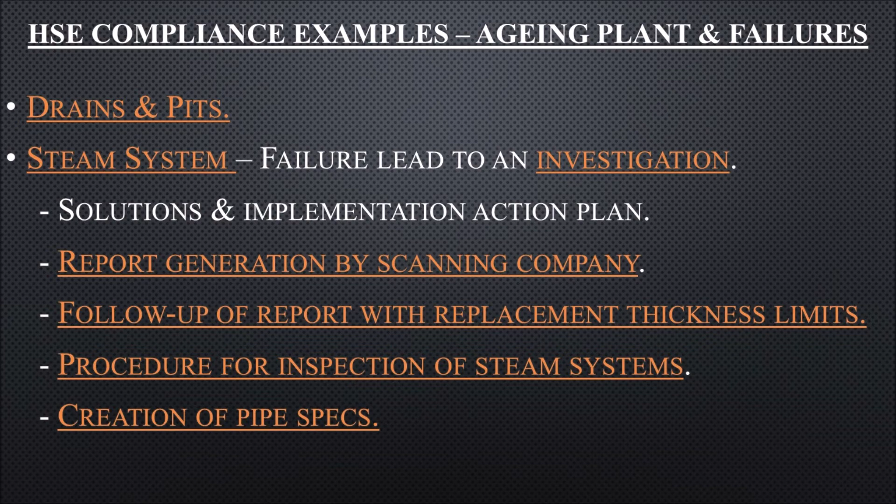This presentation gives examples of projects worked on which were required as part of health, safety and environmental issues.

Chemical pits and drainage systems. Rainwater, sewage and chemical drainage containment systems all had issues and required a full survey to diagnose the scope of works required. A specialist drainage CCTV company was contracted to carry out surveys, locate problem areas and advise on repairs. This data was used to update the client's GAs and document repairs required, with time and cost schedules to coordinate workarounds during repairs and permitting.

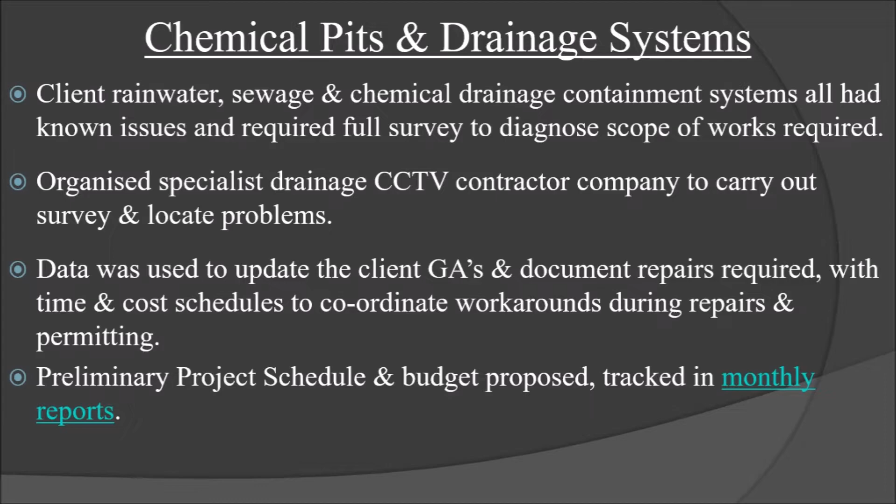Preliminary project schedule and budgets were proposed. Once approved, these were reported on monthly. Survey phase: the existing GA was given to the contractor to assist surveys.

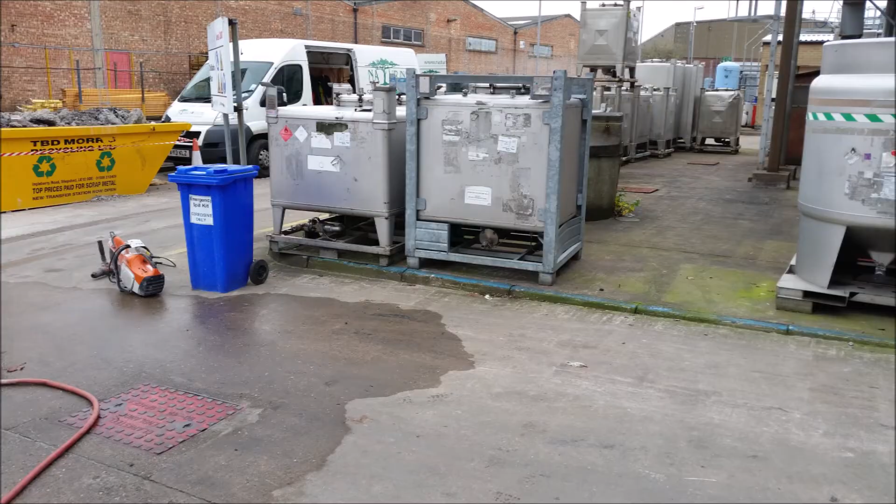There was a setback as a number of manways were sealed shut, requiring breakout and replacement. Once manways were replaced, surveys were completed and numerous issues were identified, including GA errors, holes to ground, man-made and natural penetrations, joint misalignment and cracks.

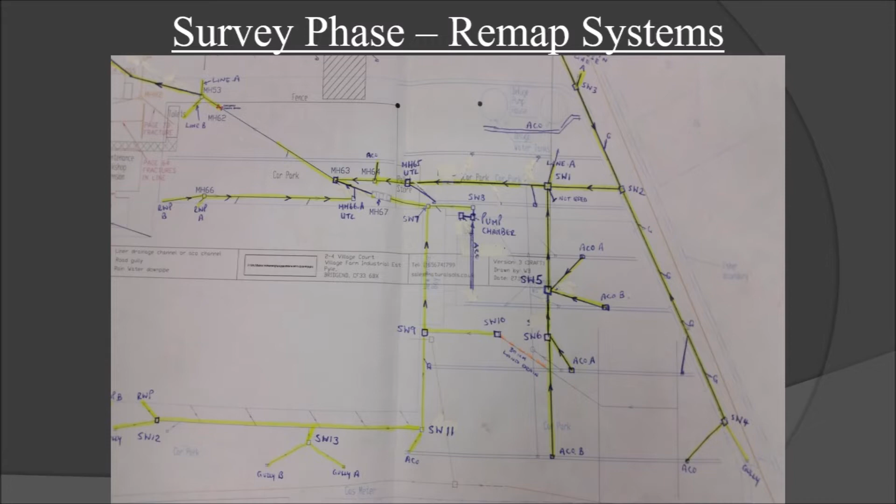The sewage system was outdated, with pitch fibre pipe found to be blistered and crushed, and surface water issues. There was not enough rainwater drains for the surface area.

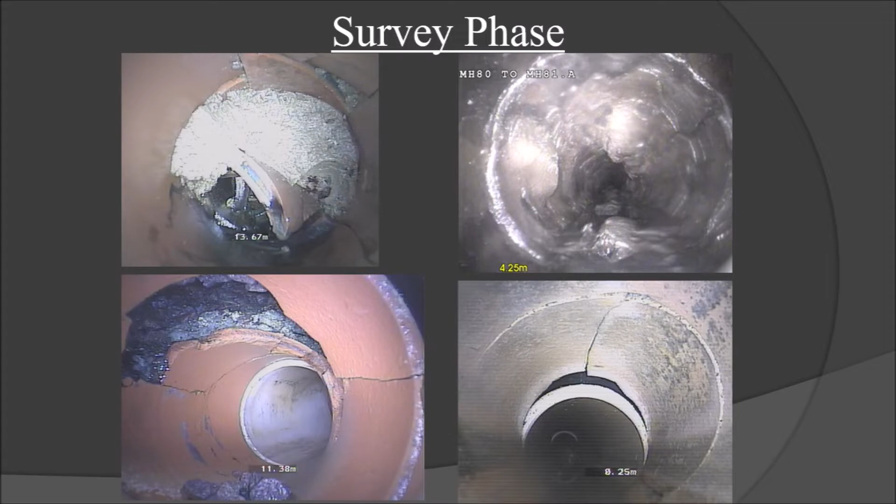Analysis of redrawn systems via HAZOP showed that in some areas chemical separation was required to prevent incompatible materials mixing in the event of containment failure.

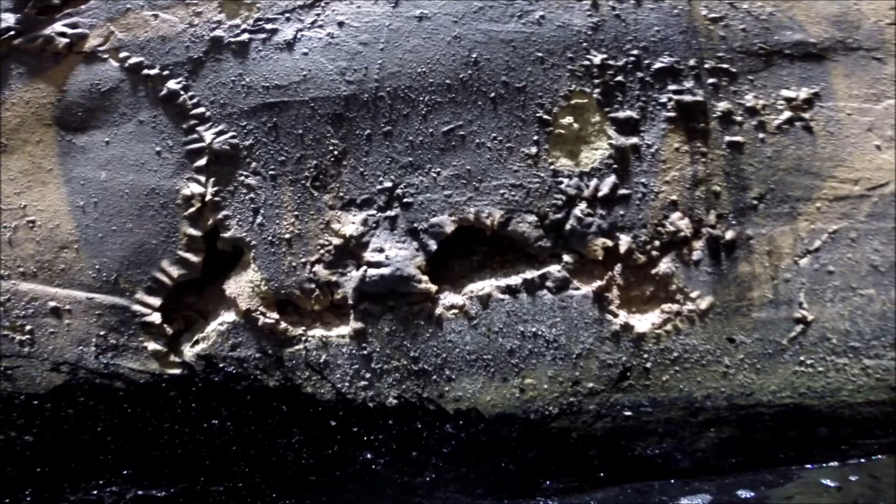Proposals for separation and rerouting of existing systems were presented and agreed upon in a series of meetings. Underground pits were badly corroded, and due to the difficult nature of maintaining these, each system was redesigned to isolate the pits and replace with local sumps and above-ground pumping with auto-start sensors and gas detection systems.

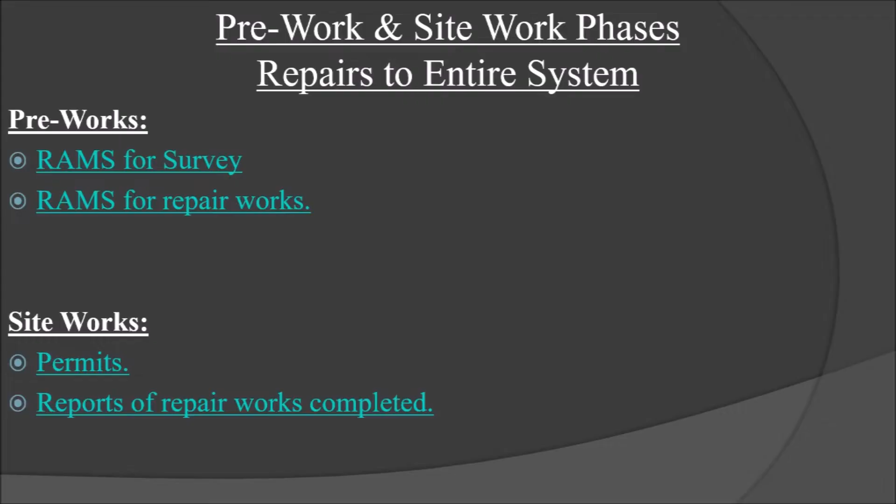Repairs to systems were examined in pre-works meetings. Examples show RAMS for surveys and repairs once these were agreed upon. Permits were issued, and once work was complete, reports were provided.

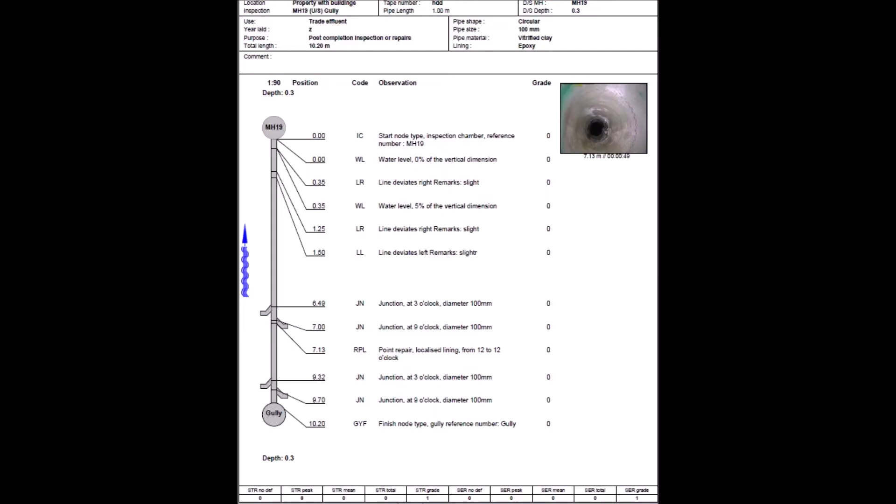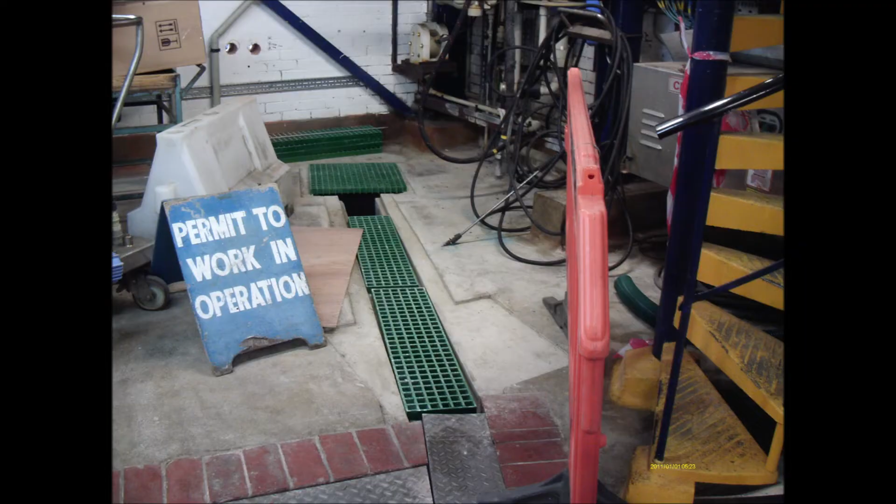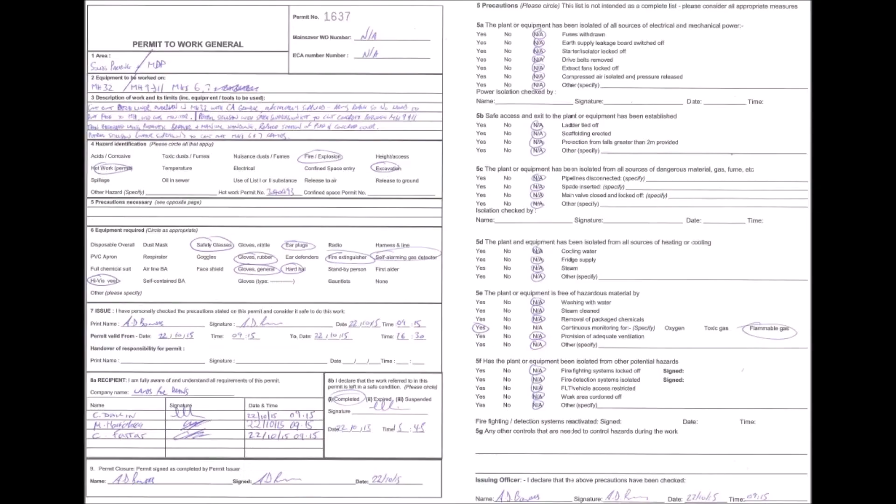While repairs were being carried out, design of improved systems was undertaken. This example shows the use of temporary pumping to IBC to maintain operations and keep the gully dry, enabling works of extending the floor gully and installing a sump for the long-term solution of pump and piping system with integrated vapour detection. Site works for these required permits before commissioning and handover of the installed system.

During these works, it was noted that the existing brick gully was failing with many loose bricks, resulting in chemicals getting past this gully and damaging the floor. A general arrangement was created of the existing gully system for the client to obtain a quote for recommended future work: replacement of bricks with chemical-resistant coated concrete.

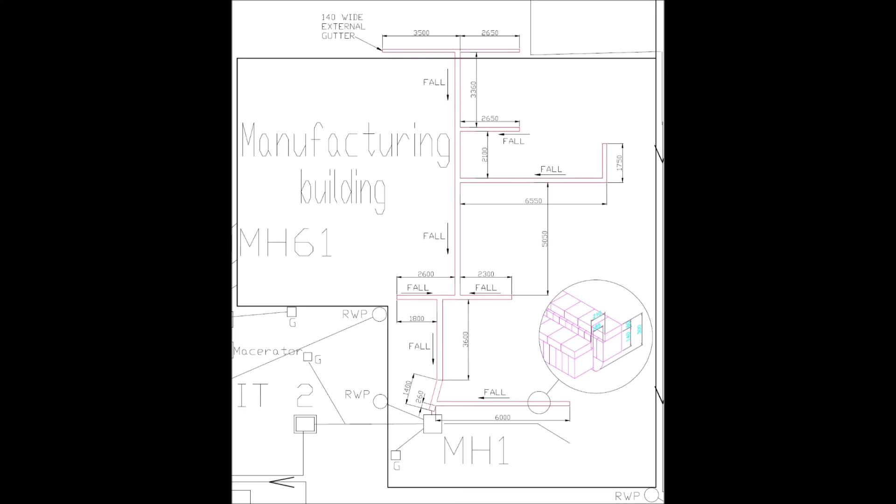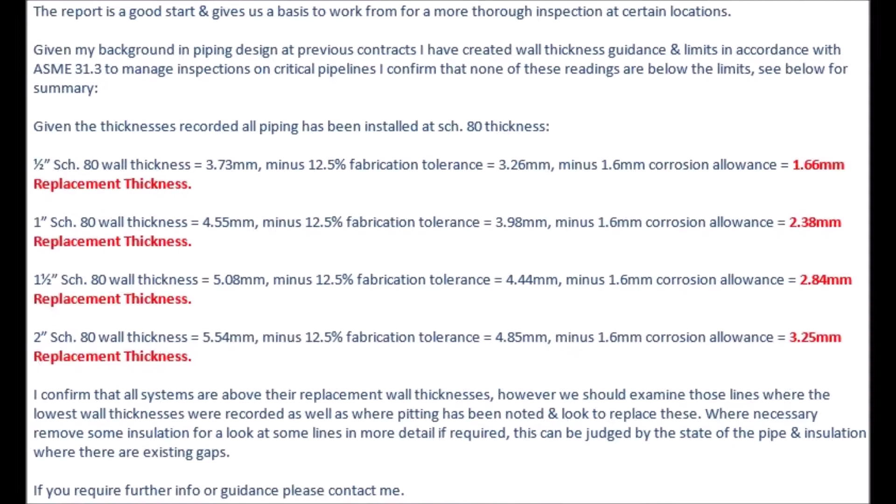Failure of a steam system led to an investigation. A solutions and implementation action plan was created, requiring a report by a scanning company, which was followed up by replacement thickness limits defined from ASME code, and the creation of a procedure for inspection of steam systems, along with pipe specs to prevent the use of threaded pipe on steam systems again.

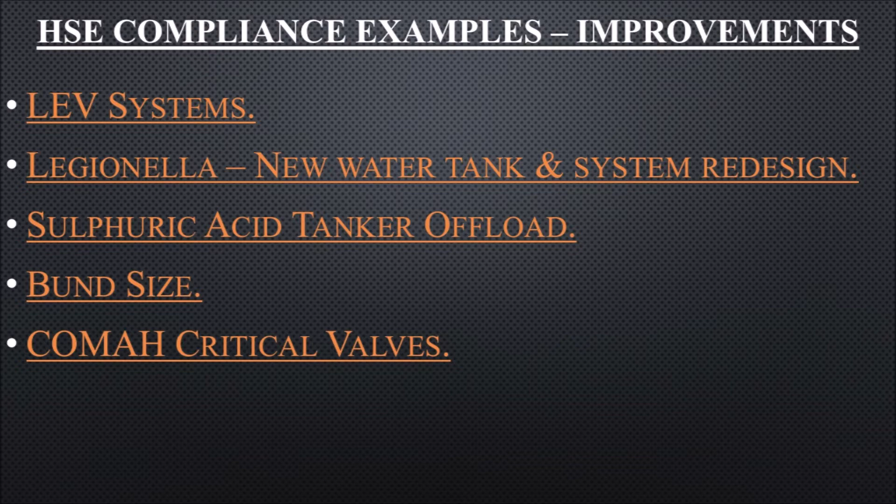HSE compliance examples: LEV systems. A report from a specialist highlighted non-compliant LEVs and actions required due to poor design and damaged equipment.

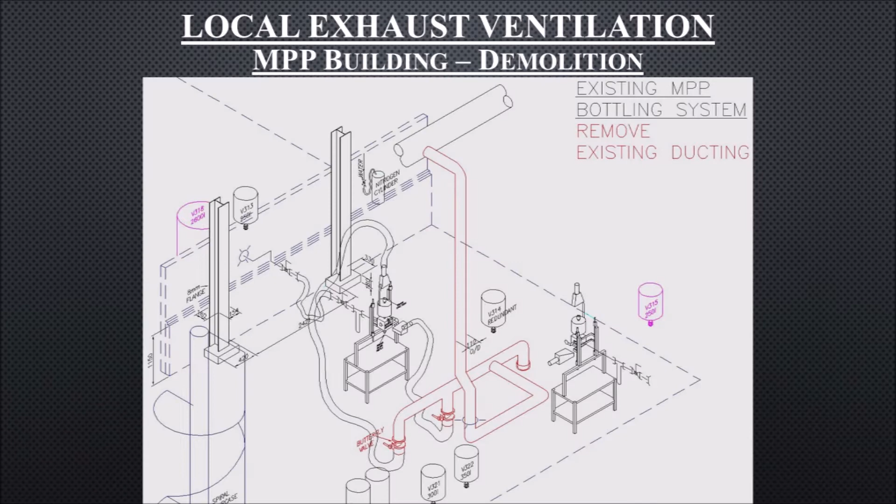Site operatives were consulted, and these systems were drawn out to show proposals for demolition and construction based on usage requirements. This included nozzle design for fabrication on a bottling station.

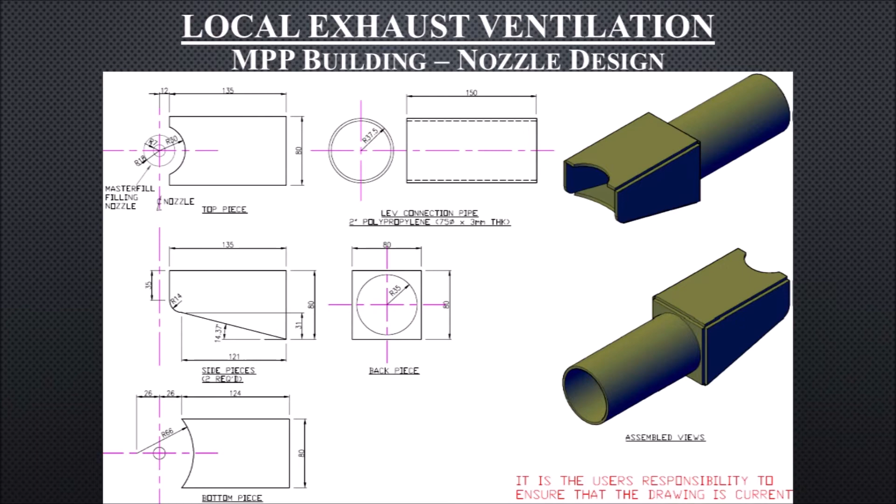Then an installation contractor was brought on board to further refine these designs and carry out the install. These systems were commissioned by smoke tests. This process was repeated on all highlighted non-compliant systems.

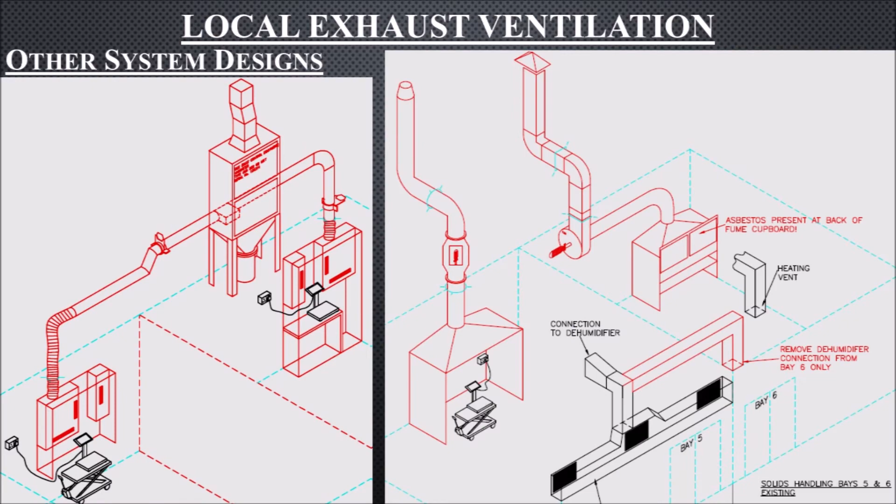A water tank replacement project was carried out following an investigation. The existing system was sketched out and a logic diagram created.

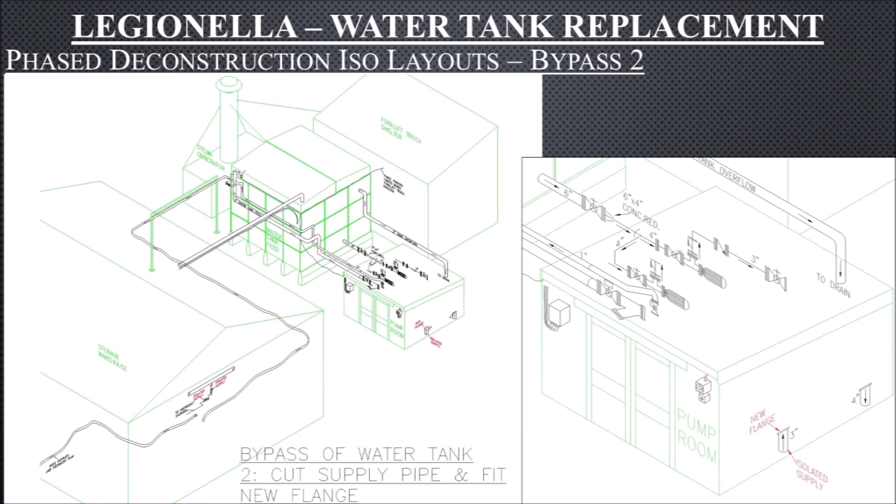To carry out the demolition work, the existing system had to be isolated and bypassed. Once complete, the old tank was demolished to enable a new vessel to be constructed, including a new pump system with recirculation. Sulfuric acid system work.

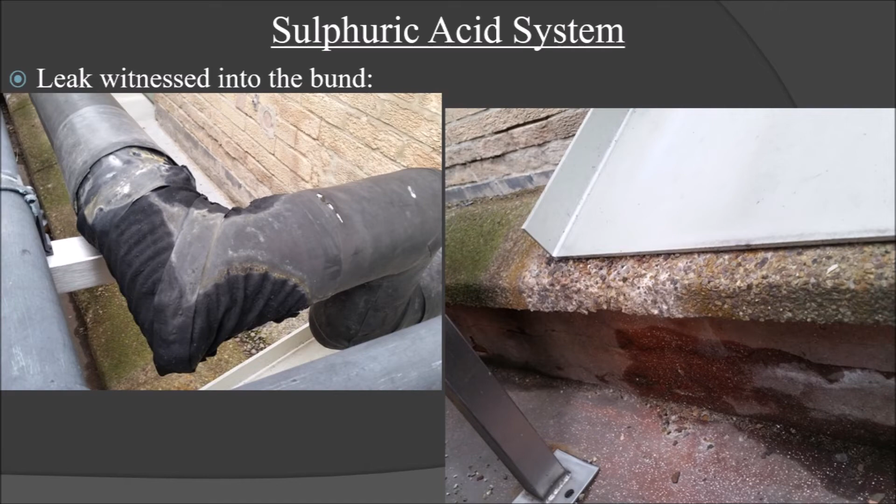During a site walkaround to identify the cause of an alarm sounding, a leak was noticed in the bund. By chance, around the same time, there were quality issues reported in the bottling of this chemical, the cause of which was unidentified. The system was surveyed, an ISO layout drawn, and the underside of the header tank had a distinct dark patch, unlike the others.

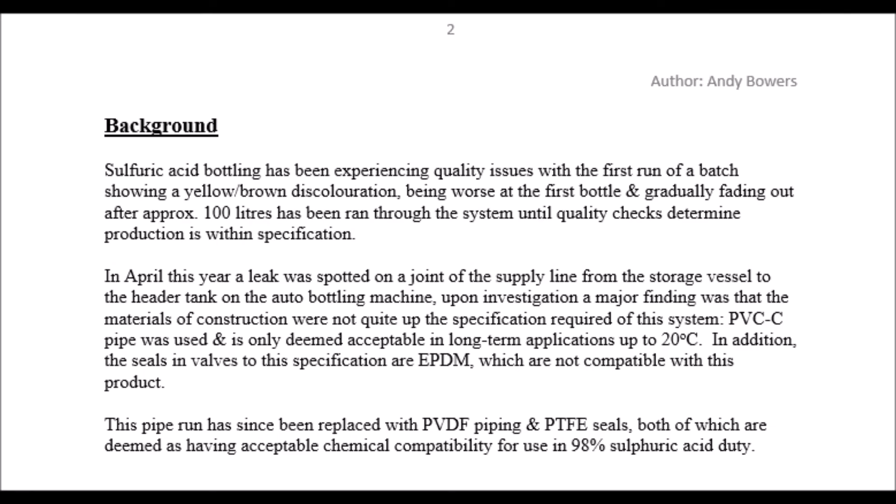It was discovered that the piping was PVC-C with EPDM seals, which are incompatible with sulfuric acid, and the leak, quality issues and dark patch all had the same root cause: the seals being dissolved by the acid. A report was generated showing this was the issue, with immediate and longer-term actions to remedy the cause.

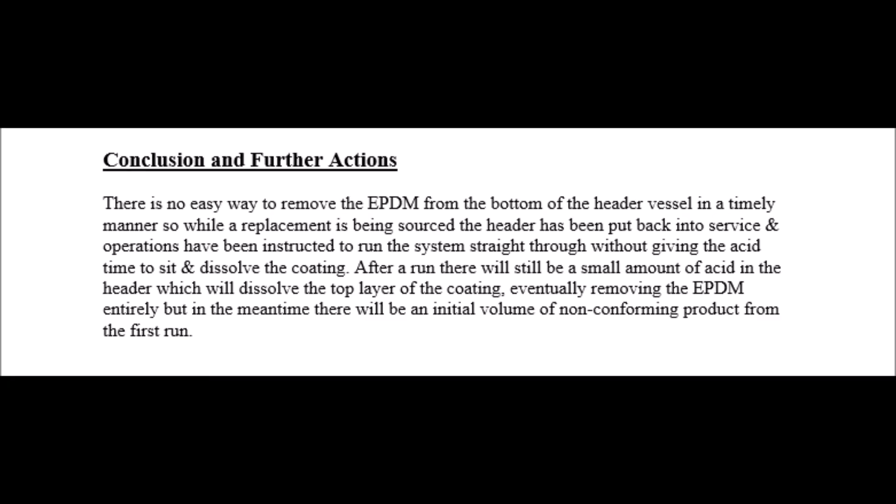During the survey, a number of other issues with the tanker offloading system were identified. The valve, storage bucket, hose and isolation were not to the required standard. These were addressed in a meeting with actions assigned.

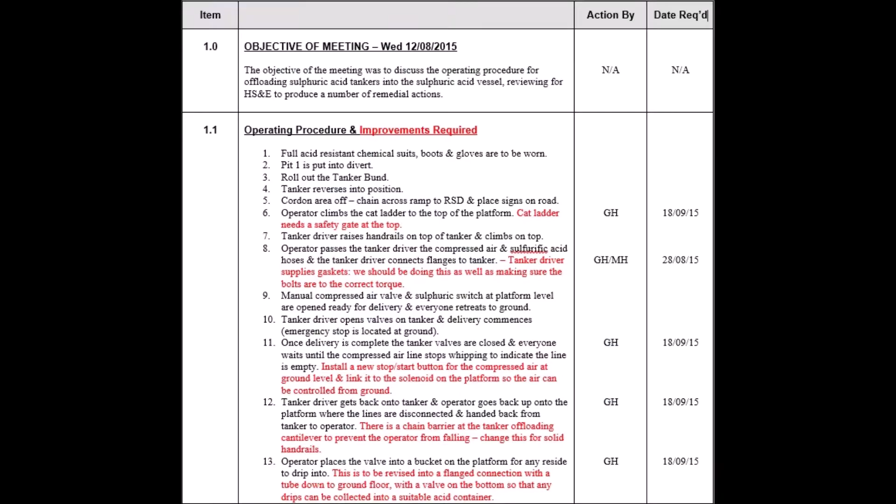A quote was received for the replacement of the piping for the compatible spec. A funding request was raised and approved. Once the replacement was complete, the system was commissioned and pressure tested, then handed back to plant.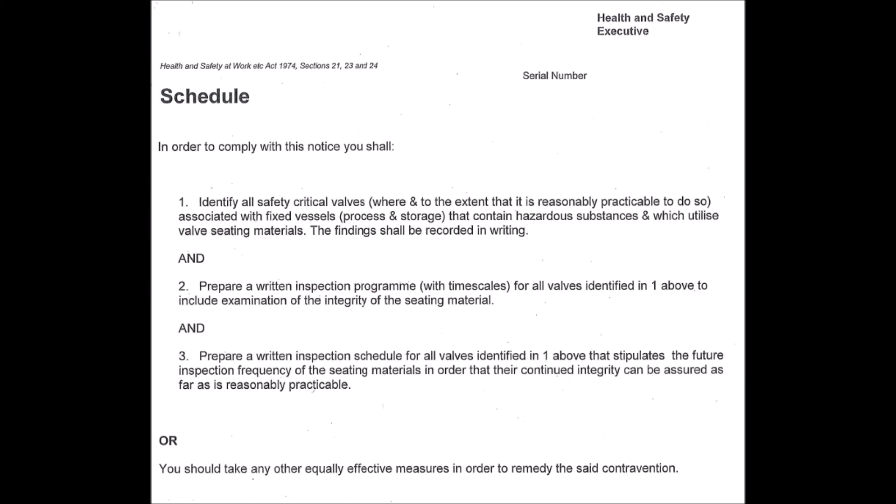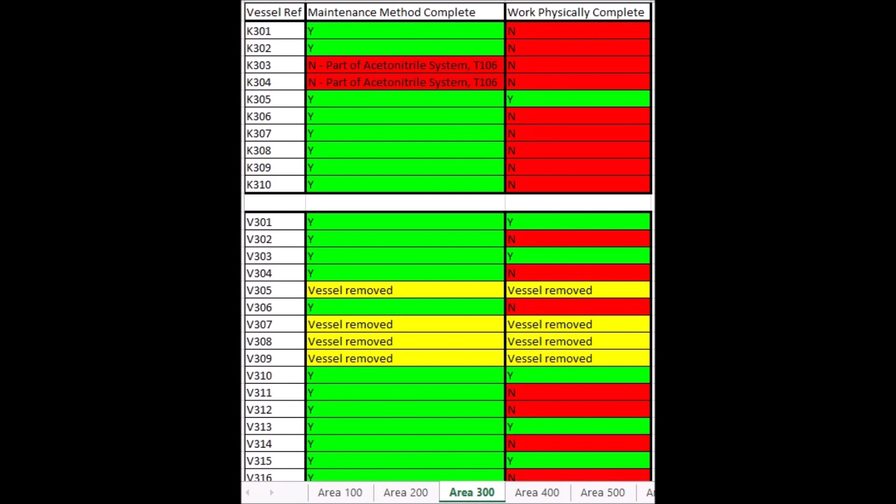The HSE issued an improvement notice to a client as there was no record and maintenance procedure of the safety critical valves, which act as final isolations on vessels containing hazardous materials. To comply with this notification, a series of meetings were held going through each P&ID, updating the logic diagrams to suit existing systems where required, and recording each critical valve to be maintained, along with maintenance procedures for system isolations to enable these tasks. Contact details.